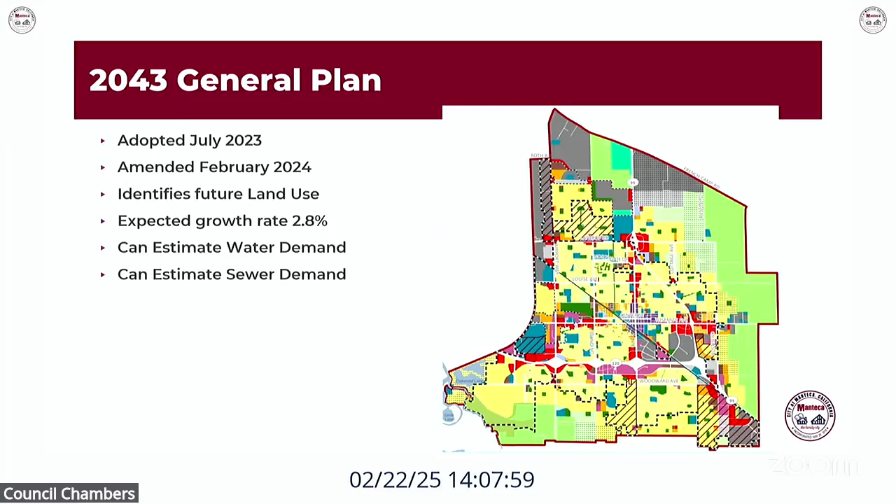So I'm going to go ahead and take a pause for any questions that anyone might have on my portion of the presentation. The public is welcome to enter their questions in the comments field in the Facebook live chat. We'll give it a few moments.

One question that came in was, why can't we put this to a vote? Can you clarify the process of approving proposed water and sewer rate increases, or will we get to this during the later portion of the presentation?

That is an excellent question, thank you for whoever asked that. And actually, we have an answer to that question coming up later on in the presentation itself. So we really appreciate your patience. If you just want to hang on for a little while, we are going to be answering that within the presentation.

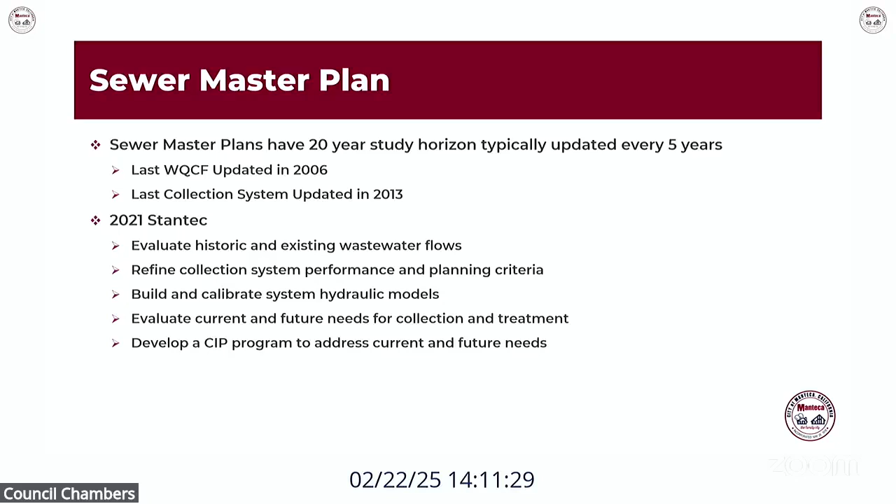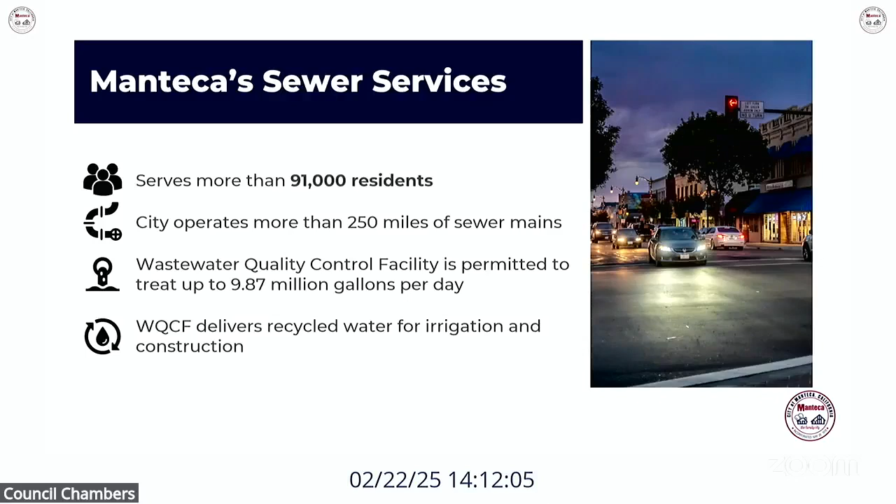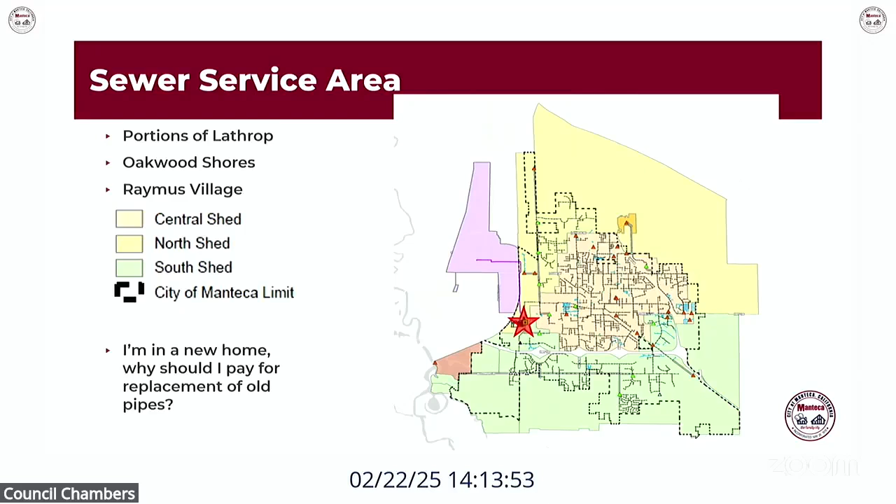If we stop growing, stop building new homes, we wouldn't be collecting those capacity fees that would help to pay for the upgrade of the existing system.

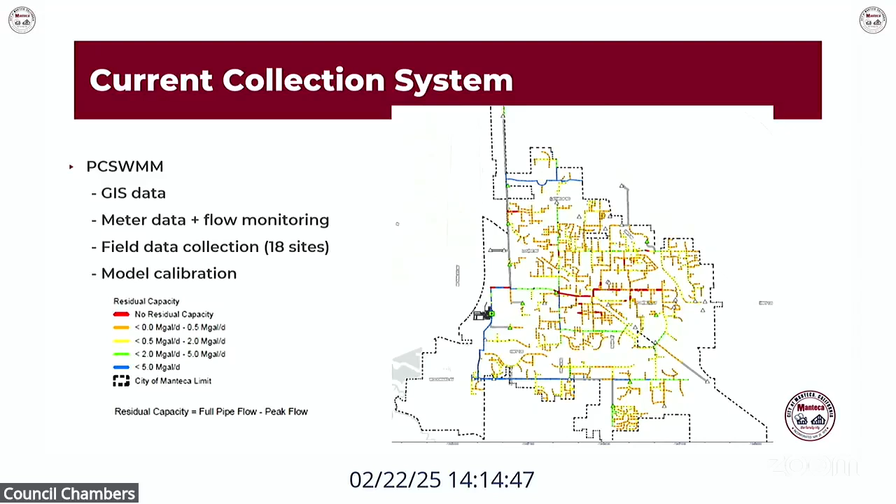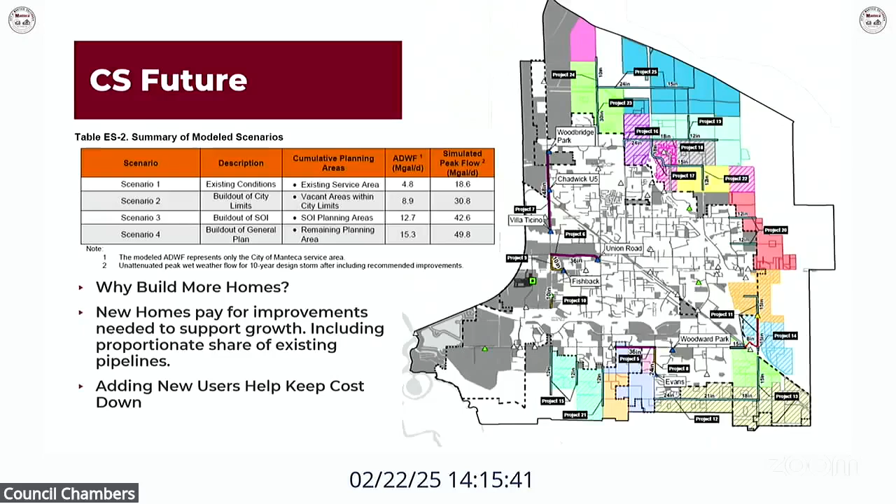The future, these are all the future expansions. If you look at all these costs, there are lots of projects, lots of increased flows. Again, why build more homes? Because these homes that are connecting to our system are actually helping to pay for the improvements needed to maintain our existing systems. So if you're a long-time resident and you're in these older areas that have pipelines that are going to be falling apart, you want new homes to come online, because they are actually going to help replace and repair those older pipelines. That ultimately helps to keep the cost down for all users, because you're sharing some of the costs between existing users and future users.

A little bit of history on the wastewater treatment plant. It started operation in 1959, and its last major upgrade was made in 2006. The average dry weather flow, that is the permitted capacity for the plant, is 9.87 MGD. The current NPDES permit, which is what you're required to have to discharge to the river, expires this coming March. So we are in negotiations with the regional board to try to maintain our current permitted capacity and hopefully expand it.

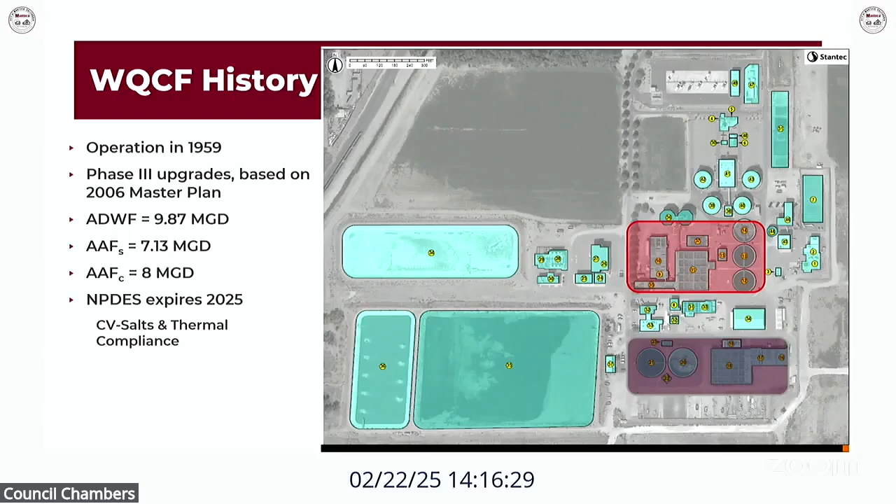Having said that, if you go and look at the more recent data in terms of population growth and increase, we're slightly above that, 2.8%. So we are struggling right now. We are running right up against our permitted limit. So we do need to advance these interim improvement projects as soon as possible.

Once the interim improvement projects are done, we do need to work on the phasing of the next expansion project. We're planning on expanding in 2 phases. So phase 1 expansion should take us out to 2048, and then phase 2 is going to take us beyond that.

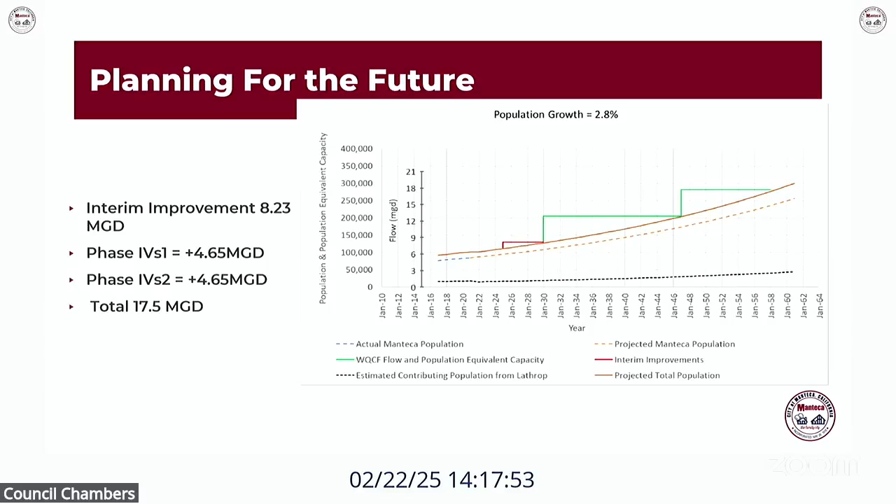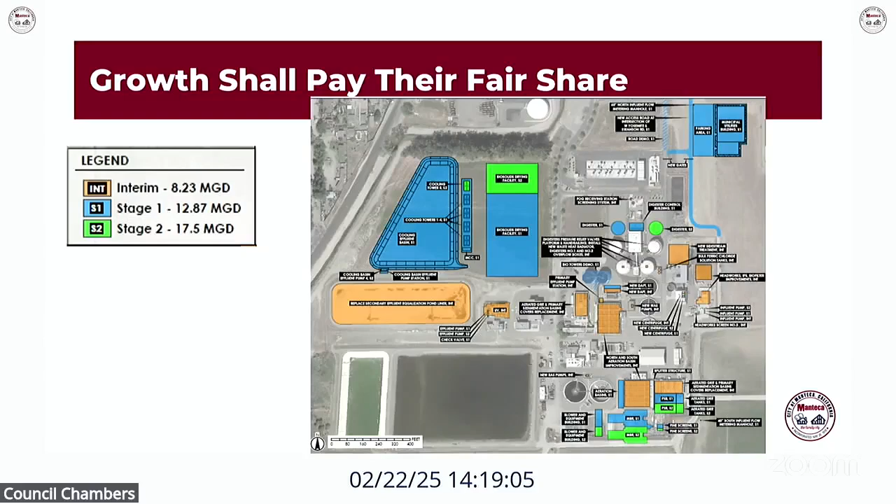With that, I'll take a pause and see if there's any questions before I move on to the actual sewer rate study.

At this time, no further questions other than the ones brought up about sewer rates being based on number of square footage and restrooms, which I think you're going to get to in the upcoming slides, as well as the 218 process.

We'll get a few more minutes and then before moving on, or? You can continue, and we'll pause if another question comes in.

Okay, so we'll go ahead and dive right into the actual sewer rate study itself. So this is not to try to make anyone feel better, but it is a fact. The sewer rates haven't changed for coming up on 2 decades.

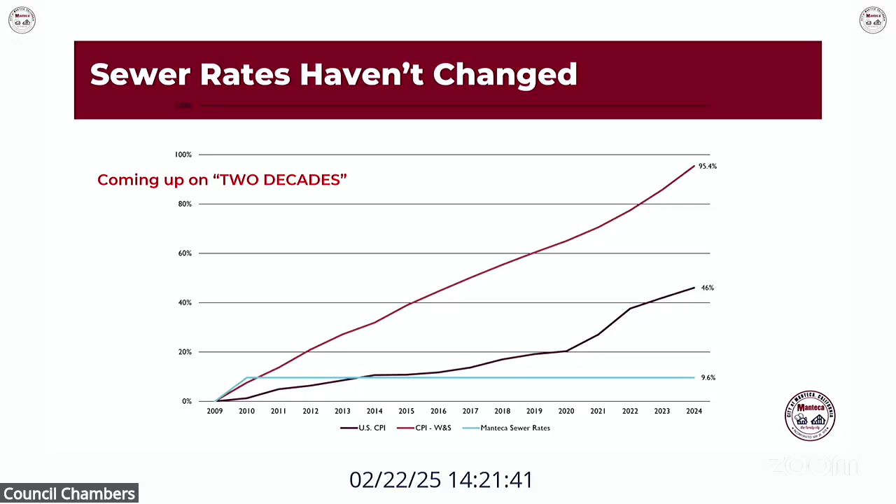Of course, Manteca being the city, being an organization, when you look at just the CPI, that is not a good indication of what the actual cost increases are that the city sees. There is a more detailed breakdown, which is specifically related to just water and sewer. And so when you're looking at costs associated with water and sewer systems alone, that has increased over 95% since 2009. So this is just a reminder of why these increases are needed at this time.

The current financial conditions are here. This is the facts of the matter, is that the revenue that we're bringing in every year, and this is based on 2024 data, we're bringing in about $16 million per year. The basic operating expenses are $14.1 million. So that means there's only about $2 million left for any improvements.

And if you recall back on the slides on all the improvements needed at the plant, those are some really, really big numbers. I think we're looking at about $20 million per year. And so you'd have to save for 10 years to be able to deliver 1 year's worth of project. That's just not feasible.

What do your sewer rates pay for? You have the collection system that collects the sewer from your home and conveys it to the treatment plant. It also pays for the actual treatment of the sewer, disinfection, and final discharge into the river.

You also get a staff that's dedicated, on call, licensed, and certified. They're on call to operate and maintain all the series of pipes, pumps, and any treatment process that could go wrong.

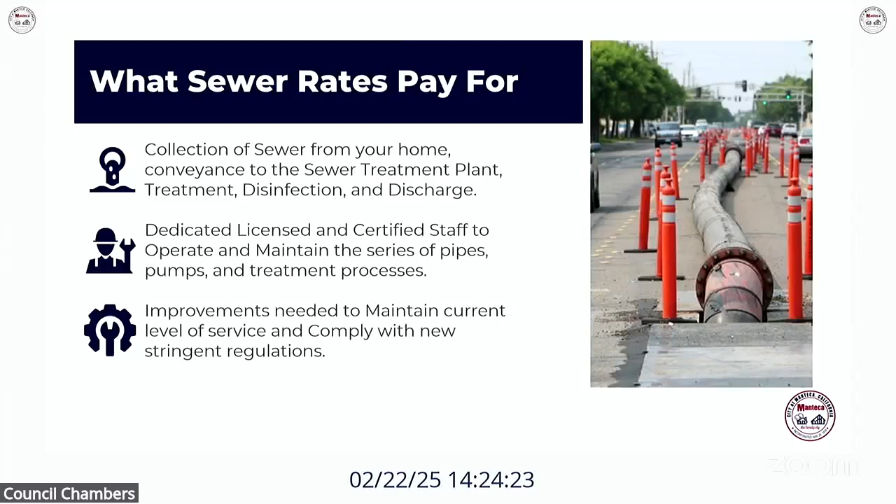How do we determine the rates? We can't just pick a number and run with it. We can't just say CPI has been increasing for the last 20 years, so we're going to increase your cost based on CPI. We can't just say our costs are X, so we're going to increase the cost to the customers.

We actually have to hire a third-party consultant. The city contracted with Stantec Consulting Services to put together a rate study, called a cost of service study. They take all the data provided by the city to determine what the costs are, and come up with the actual rate study and structure.

They also take a look at it on the professional level to make sure it's fair and equitable, and that the charges we are charging are fair and equitable to everybody, not just one particular class of customers.

So is new development causing my sewer bill to increase? The reality is no. New development is not the reason for the sewer increase. New developers pay or are charged capacity fees when they connect to the system.

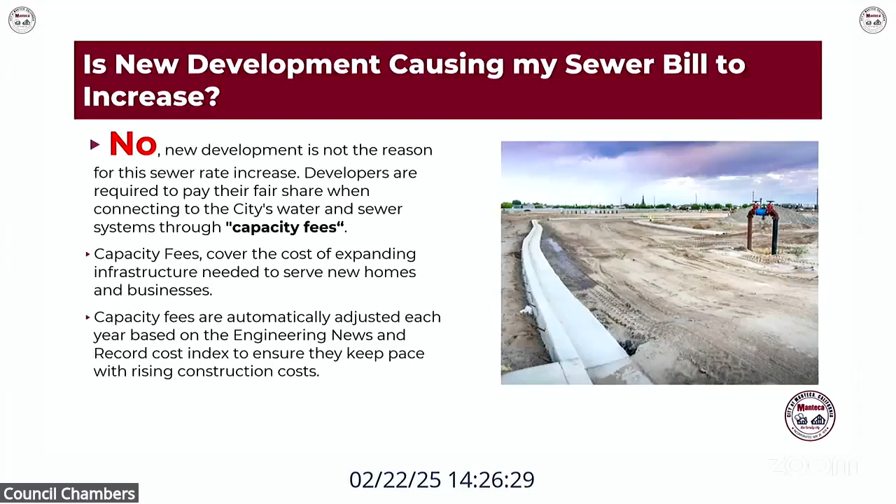Why are sewer rate changes being considered? Again, as a reminder, costs have increased over 90% for the city. The cost of maintaining the existing system has increased, and as time goes forward, existing infrastructure is starting to fail.

And to not fix the issues we see before they fail, running it to failure is actually going to end up costing more to the residents.

So if we don't have these increases and we run the system to failure, we would have to borrow money to fix the emergency and enter into an emergency contract with a contractor. We're not going through the normal design, bid, build process, which means your costs are going to be significantly higher, plus there's the cost of borrowing the funds.

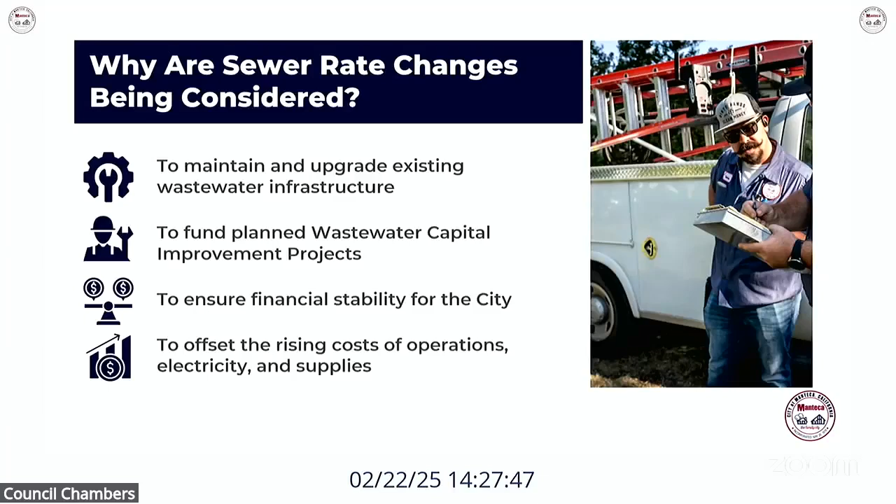The actual construction itself is going to be more expensive because it's not planned, and those costs would then be passed on to existing ratepayers. So we are trying to do the right thing by doing preventive maintenance, taking a look at all the systems and replacing them before they actually fail, which ends up saving money overall.

What's new? Some of the things we are making changes to: the existing system had 18 different unique classifications. To make it more simple, we are collapsing those 18 unique classifications down to just 7.

We have a classification for single-family residential, multifamily residential, mobile homes, and then commercial low-strength, mid-strength, and high-strength. There's also an industrial class user. Those are more strength-based, and we'll address those on a case-by-case basis.

So this is where I'll take the time to answer the question about why we can't do it based on square footage.

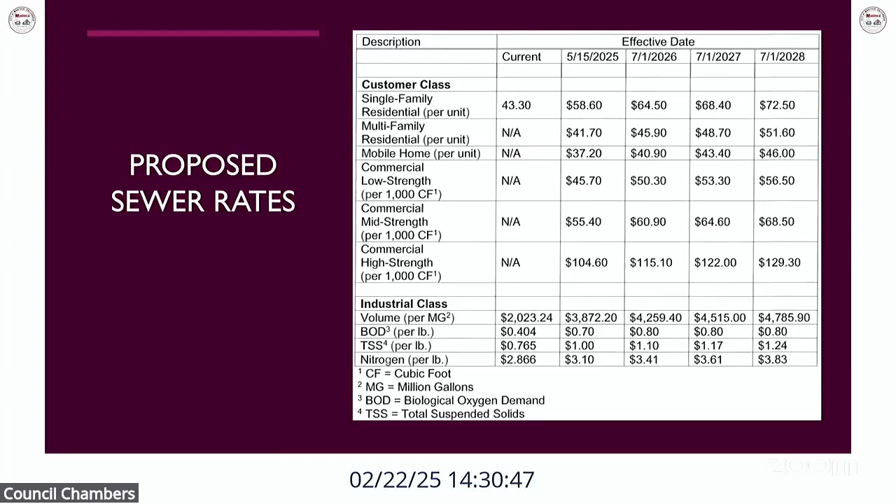How do we compare with others? If you attended the last community meeting, the data we have was old, based on the end of 2024. We did go through and revise our records with the information we have as of January 2025. And as you can see, we are towards the bottom currently, but even with the proposed increase, we're still a lot less than some of our neighboring agencies.

Take a look at Stockton, we're very comparable. And then if you take a look at Lathrop, that's $83, so they're significantly higher, and Lodi is the leader of the pack.

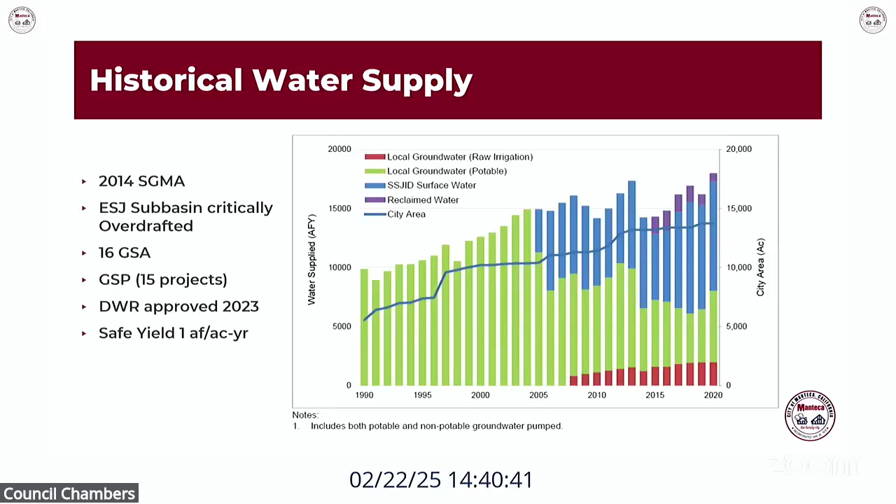Now, with that, there are added costs because we are purchasing that surface water. And because we haven't been increasing our fees to the users, that is a cost the city has been trying to balance without going back to the users to increase rates.

As part of the master plan, we conducted a hydraulic model of the system. Lots of lines here, but what I want to mention to everyone is the system that the city operates on the water side operates under one zone. So there's only one pressure zone.

And that's really important to know because since we're all under one zone, the network is very important. So no matter where you are in the city, you are reliant upon all the pipelines and the wells and the surface water connection points to provide clean, reliable water service to your property. So I've heard folks say, I'm in a new subdivision, I have a new well, I have a new pipeline. Why should I pay for improvements to the existing system?

Again, it goes back to reliability. If you had a problem at a nearby well site, because the entire network works as a whole, you are being provided water service from another source. It might be a surface water source, or it could be another well on the other side of town.

Future needs. Again, this is just showing that the system pressure is really just one zone. Looking at all the future needs, this is a model of the future build-out conditions. So you might be in a new development on the east side of town, but again, you are relying on the network of pipes and wells to be able to provide you with clean drinking water.

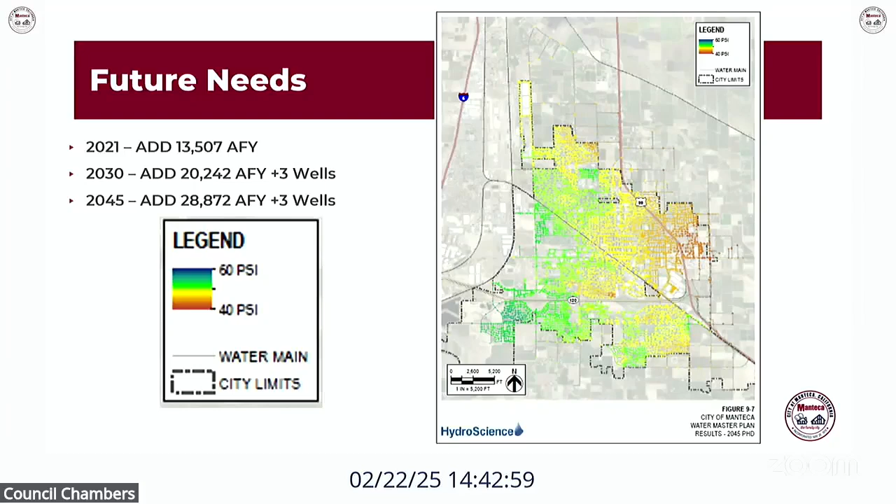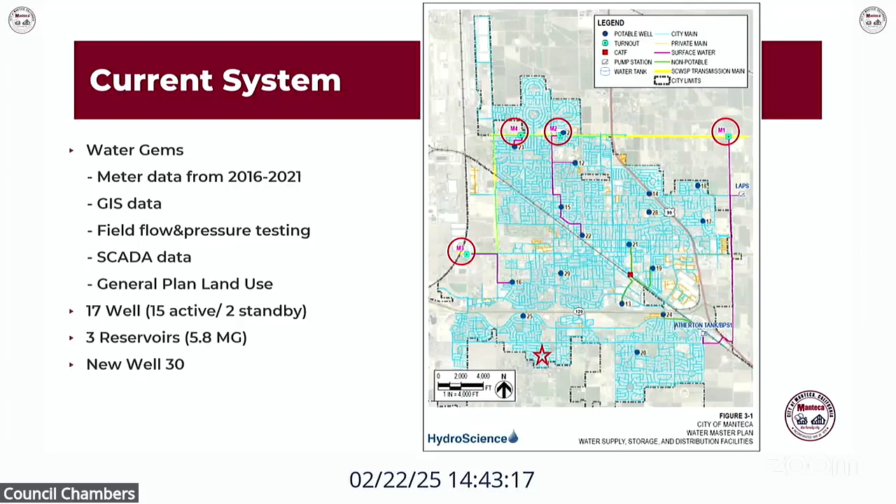So this is a good picture of, let me go back a little bit. So this is the pipe network, right? And again, very similar to the wastewater system, the community, the city, started out at a nucleation site. So downtown Manteca, those were the first group of folks that got together, decided to form and become a city. And then everything else is built up upon those original pipelines.

Some of those pipelines have been in the ground for 100 years. They are due for replacement. And you could make the argument that I'm in a new subdivision, I don't need those pipelines. But again, it goes back to reliability. You still need and you still rely upon those old pipelines to provide you service so that you can transfer the water from one side of town to the other.

So making the argument that I have a brand new pipeline, I shouldn't be paying for these replacements and upgrades of the older pipeline, that's just not true because you're still reliant on those pipelines to convey water to you from the source and to your house.

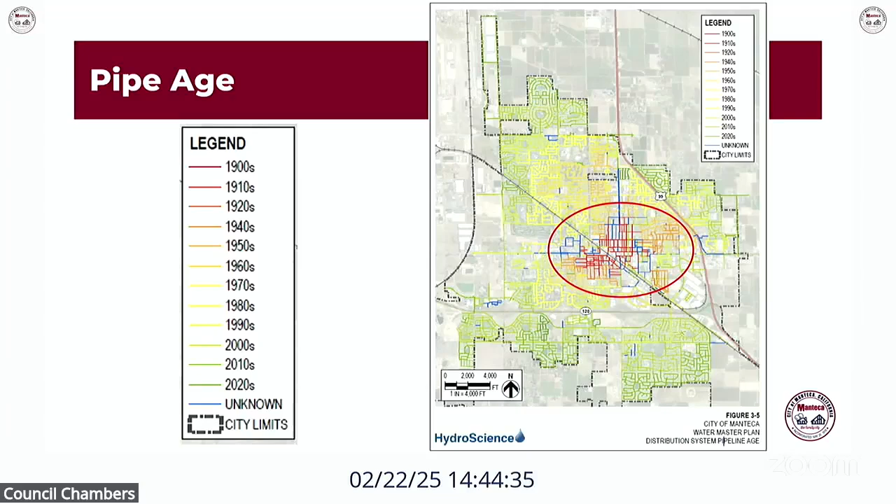Funding needs, and if you take a look at these, they are broken down into blocks. So the city is attempting to our best abilities to figure out what projects are needed right now. And when I say right now, I mean in the next 5 years, 10 years, 15 years, and 20 years. So we are trying to spread the cost over a 20-year period, but we still need to make sure we handle the more critical projects.

And so these projects have been identified. Phase 1 CIPs are shown in red. Phase 2 are shown in orange, phase 3 in yellow, and then phase 4 way out in the future.

So we are trying to spread the cost, and it's not like we're spending all the money in these next 5 years. We're only coming up on the rate studies to support the next 5-10 years of projects. And then as we approach the 5-year limit, we will do another study to determine what the rate increases are or changes, whatever they may be, based on current needs at the time.

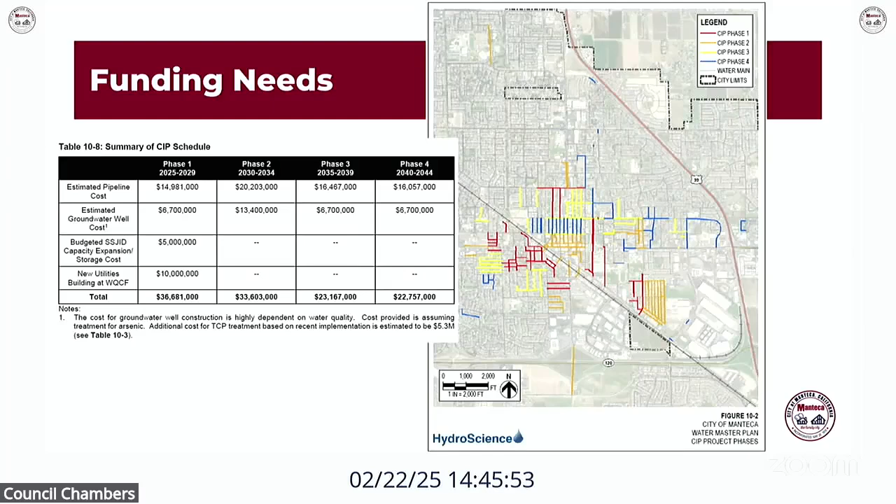With that, I'll go ahead and take a pause before we get into the water rate study. See if there's any questions.

Yes, can we address the current TCP well treatment system and how that's underway to improve water quality?

Yes, that is an active project. We were able to secure some funding through litigation, which George Montrez mentioned earlier in the presentation. Whenever the state or federal government adds a new maximum contaminant level, we're allowed time to figure out what we need to do, figure out the funding source, figure out the technology needed to remove that constituent, and then time to design and construct the project.

TCP was introduced as new legislation around 2017. At that time, we had 5 known well sites that had TCP. We entered litigation to try to get money from the folks that caused the problem, and we were successful in securing those funds. We made improvements to those 5 sites that were known at the time.

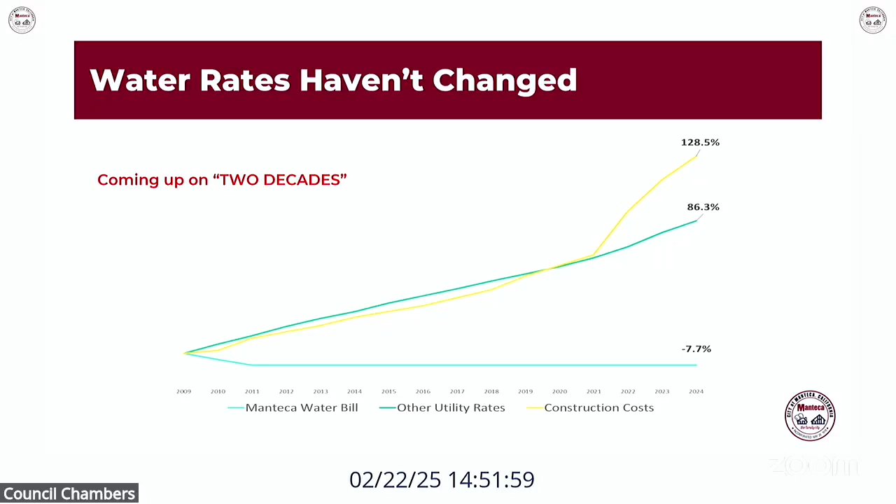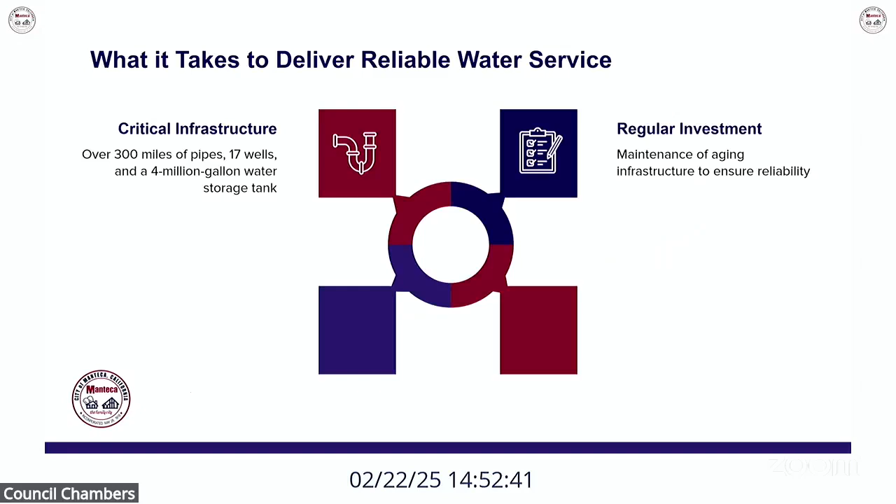So what does it take to deliver reliable water service? Critical infrastructure: the city of Manteca has over 300 miles of pipes, 17 wells, and a 4 million gallon water storage tank. This requires regular investment and maintenance of aging infrastructure to ensure reliability, a skilled staff who operate and maintain the system 24/7, and essential projects to replace or expand infrastructure to keep pace with our community's needs.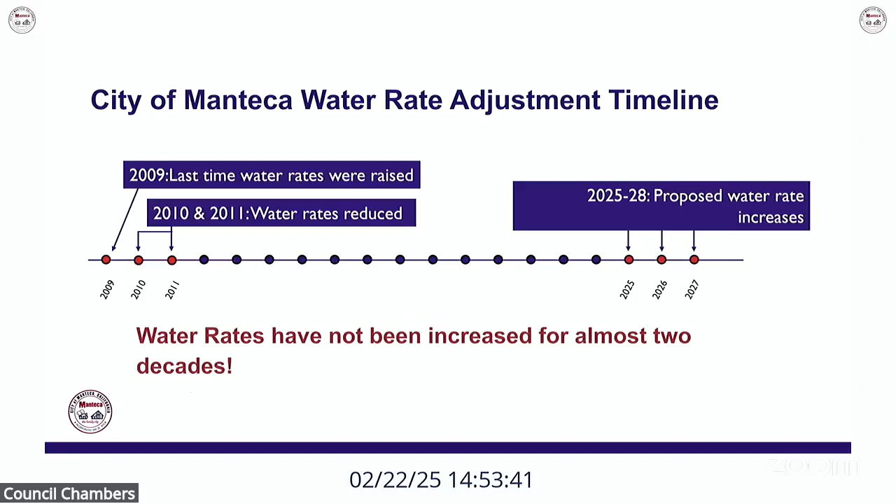As we've mentioned, the last time water rates were increased was in 2009. Water rates were actually reduced during the recession in 2010 and 2011. And as people have been mentioning, time has gone by, and now we've arrived here in 2025, which is why we're here before you discussing water rate increases. There would be additional annual increases if passed, following the initial increase.

The price of reliable water service: several factors are driving up the cost of water service. We've got labor costs, water purchase prices, material costs, and capital improvement projects.

Investing in Manteca's water system: the proposed water rate adjustments would help fund about $30 million in projects over the next 5 years to improve system reliability, including purchasing and delivering water, and maintaining and replacing critical infrastructure. The city of Manteca conducted a cost of service analysis to ensure proposed rates are fair, aligned with the cost of providing water, and considering regulatory and environmental changes.

This slide illustrates the steps the city of Manteca has completed to calculate the proposed rate increase. We've got a financial analysis which was conducted, we looked at future project funding, future capital improvements were considered, and all of this was reviewed and digested, and what came out of it was the proposed rate increase.

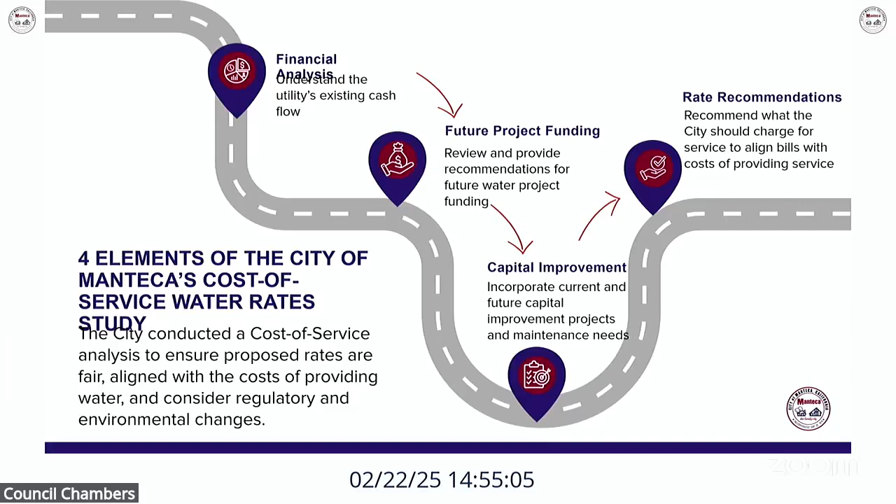About the proposed water rates: if adopted, the new rates would become effective May of 2025. Each year after that, beginning July 1 of 2026, the city would make annual adjustments. Our current rate is approximately $33.63. In May of 2025, it would increase to $60.75, with annual increases in 2026, 2027, and 2028. For a typical residential customer with a 3/4 inch meter who uses about 12,000 gallons of water each month, the monthly bill will increase by a little over $27 in the first year.

This concludes the presentation on our water rates. We'll pause again for additional questions.